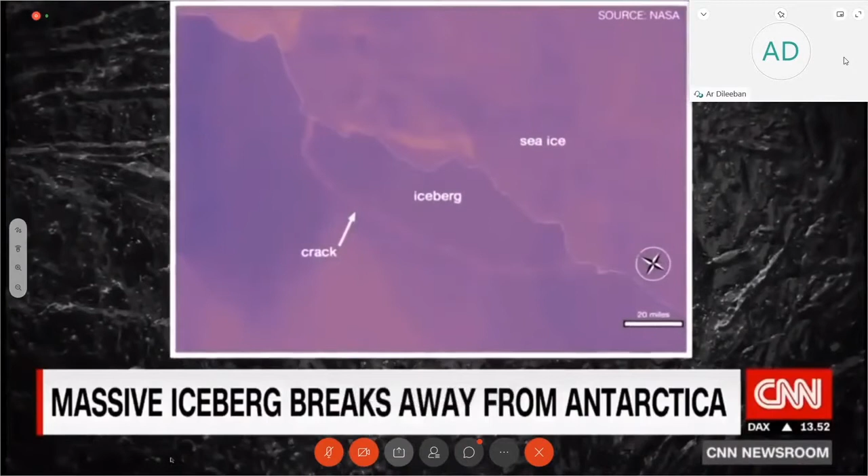More than 120 miles long on the east side of the Antarctic Peninsula, finally breaking off, creating a spectacular iceberg weighing more than 1 trillion metric tons, roughly the size of Delaware. It's one of the largest icebergs in human history. UCLA professor Aradhana Tripathi has spent her career studying Antarctic ice, traveling to the very peninsula where the ice shelf called Larsen C broke off. Professor Tripathi has seen two other big sections of the peninsula break off and dissolve, the first in 1995 and then another in 2002. She watched as this crack grew for years, caught off guard that this break happened so soon.

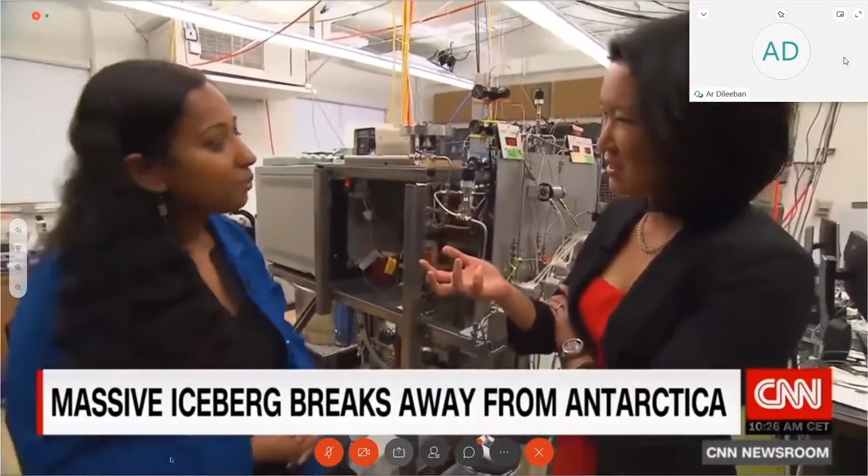What this latest break means is something scientists aren't yet agreed on. Antarctica, the coldest place on Earth, is a continent covered in ice, and icebergs have been breaking away from ice shelves for millions of years. But at the end of the 20th century, the peninsula was one of the fastest warming places on the planet. That warming has slowed or reversed slightly in this century. You learn all of this just from samples of ice, and samples of rock. This geochemist says the overall trends in the Antarctic point to global warming.

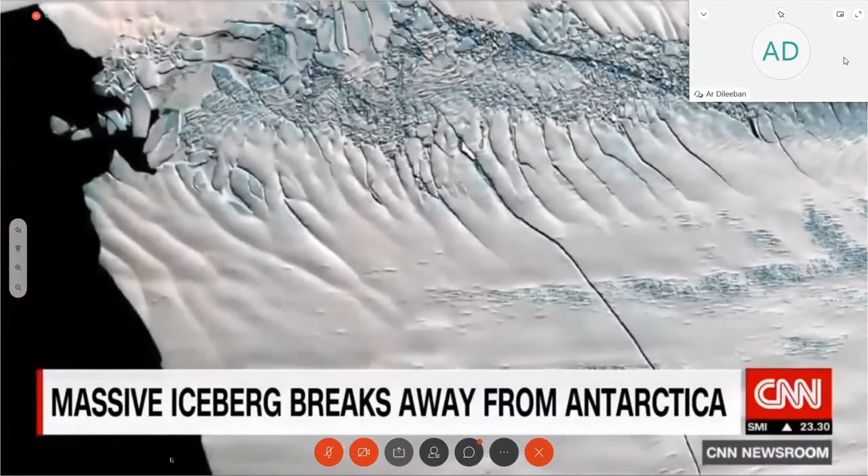The fact that we've had 7 out of the 12 ice shelves on Antarctica collapse in the last few decades, and this one appears to be ready to go with the breaking off of this major iceberg, it's hard to attribute to anything else. For now, scientists will track the new iceberg to see if and when it melts. And maps will have to be redrawn for the ever-changing geography in Antarctica. Kyung Lah, CNN, Los Angeles.

Now I would like you to understand, that means if the building industry takes care, you could have reduced 50% of this development, 40% of the carbon emissions on this earth. And if carbon emissions could have been avoided, it would have been much better, at least 50% better than what we are now. So that is where the World Green Building Council was formed.

And after that, several councils came up under that all over around the world. In 2001, the Indian Green Building Council was formed at Hyderabad. This Indian Green Building Council created a total change, a spectacular change in understanding and creating awareness about the problem of environmental degradation that we are facing.

And they created the first, actually, it was the first building constructed by IGBC in Hyderabad. And this IGBC building was actually constructed on land donated by Godrej.

A small building of 20,000 square feet was constructed. You won't believe that building became the greenest building in the whole world that year. Why? Because IGBC started studying from the Indian context what issues we are facing and how we can make it greener.

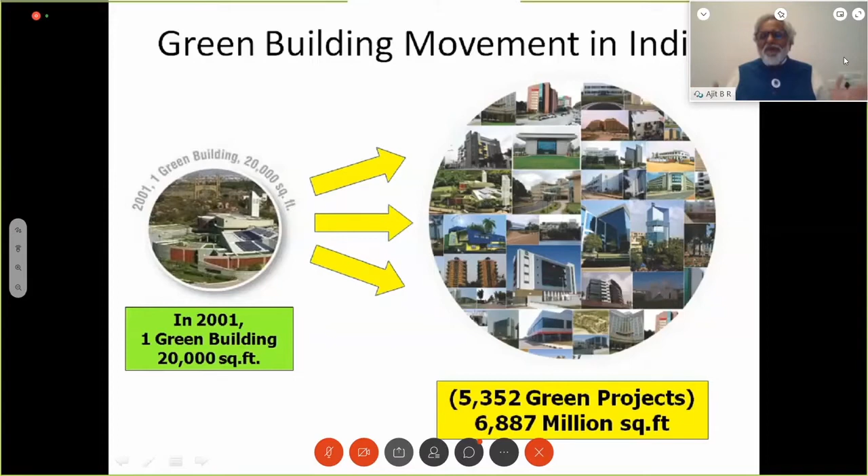The green building is the answer for all this problem today. If entire India constructs only green buildings, 40 to 50% of our carbon footprint can be reduced. So this is something which is probably what we should do.

What is green? It is the pursuit of energy efficiency, the use of recycled and recyclable products. How much can you recycle? There was a time, maybe 30 years back, if somebody wrote 'recycled,' we wouldn't use it - we'd throw it away. But today, recycled products are much more important and valuable, and a lot of organizations, including multinational organizations, ensure they only use recycled products for everything.

If it is a pencil, if it is paper, everything—that is the contribution they bring to society.

What is green? It's the use of renewable energy. You can see windmills, you can see water efficiency, ultimately leading to sustainable development. That is the word to use—sustainable development. What is sustainable development? It means using our resources to meet all our needs without depriving resources for future generations. This is what we should understand most importantly.

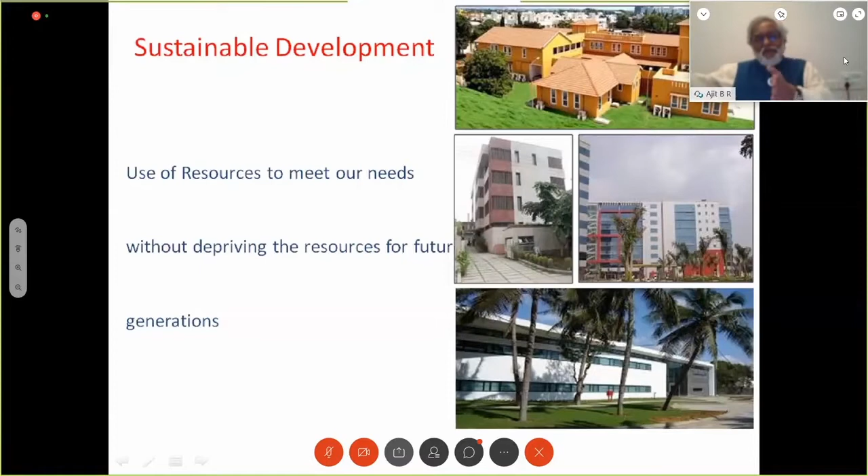We do not own this earth. We are just holding it as trustees for the future. Trustee means the future generation kept it as a trust. It is our responsibility to see that we hand over this earth in a better position than what we got as a trustee.

I just want to compare green building versus conventional building. You can see all the buildings on the right are green buildings. They don't look different—they are externally the same, both look same, and the building uses are also the same. So what is the difference, you ask me?

Green buildings are concerned with natural resources, human comfort, and indoor environment. It's a very important aspect of green building. You may think it's only this, but no—until recently we have been using paints with very high content of VOC, volatile organic compound. Now if you sell paint with VOC, nobody is going to buy it. IGBC brought out this awareness, and now green buildings have become prominent.

Comfort is very important. Are you getting sufficient sunlight? Are you getting unnecessary glare? Are you getting enough cooling even without air conditioning? All these things are very important from the point of view of green buildings.

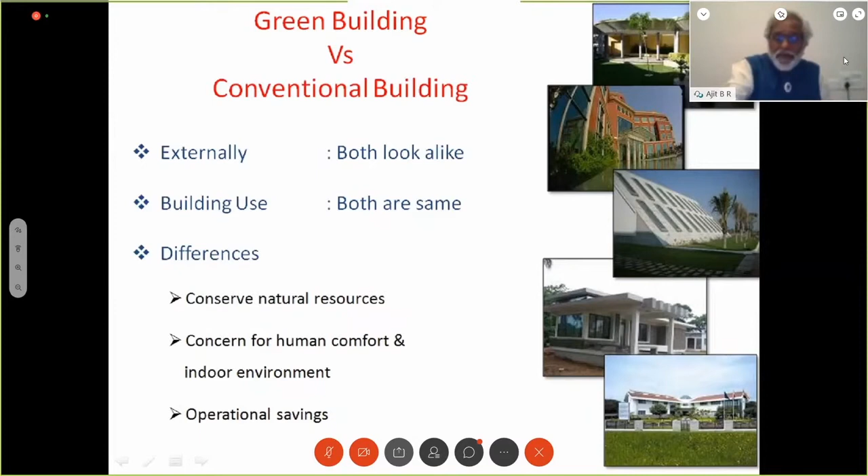What are tangible benefits? There are both tangible and intangible benefits. The tangible ones include reduced operating costs, because all the equipment used consumes less energy. You can optimize the life cycle, improve economic performance, and achieve energy saving.

50% savings has been seen, I think lately it is even more. So a lot of air conditioning companies have come out with fantastic energy-friendly air conditioning systems, because most of the energy used is basically by air conditioning. Water saving is 20 to 30%, and also, in the beginning when we constructed the first green building in India, many products had to be brought from abroad. Today, because of great demand, green products have become very cheap—probably in some ways cheaper than non-green products.

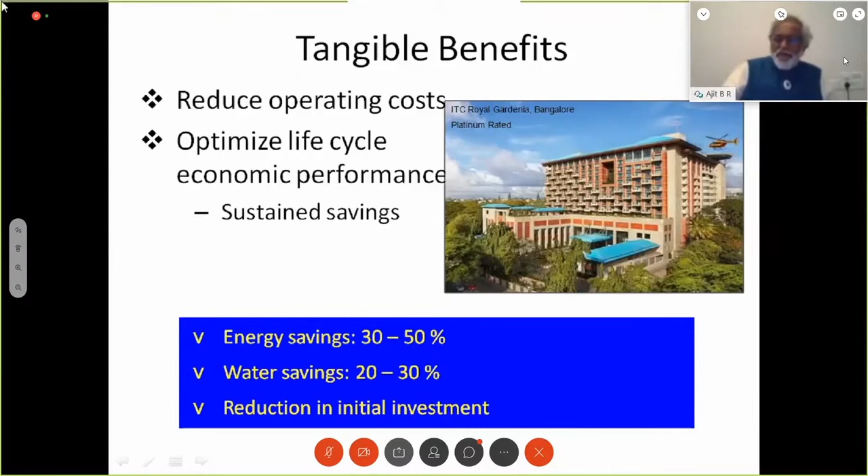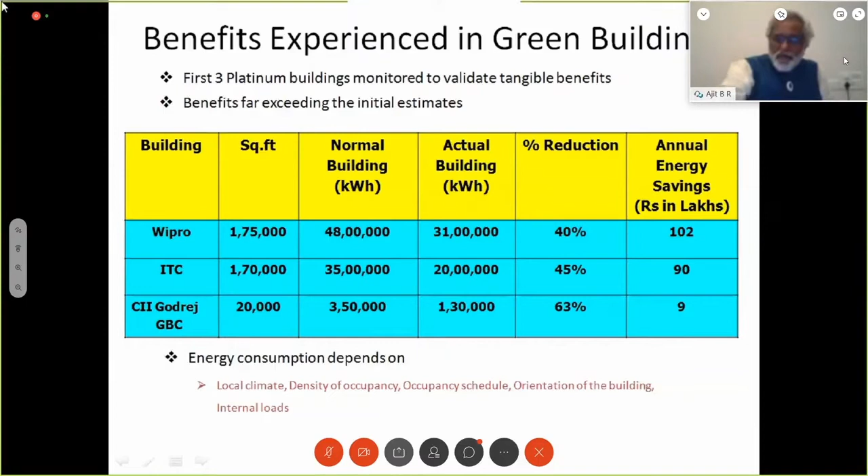So what are the benefits in green building? You will see the benefits in green building. The annual total benefits of certified projects is about 8 million tons, and in each of the green buildings, carbon dioxide reduction and energy saving is 10 million, water saving is 30 million KL, and construction waste diverted from landfills is 3 lakh tons. This is talking about 1 million square feet of building.

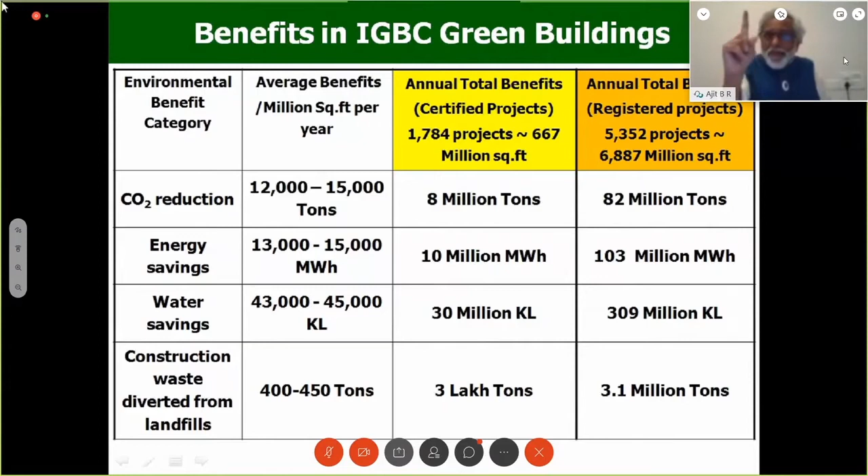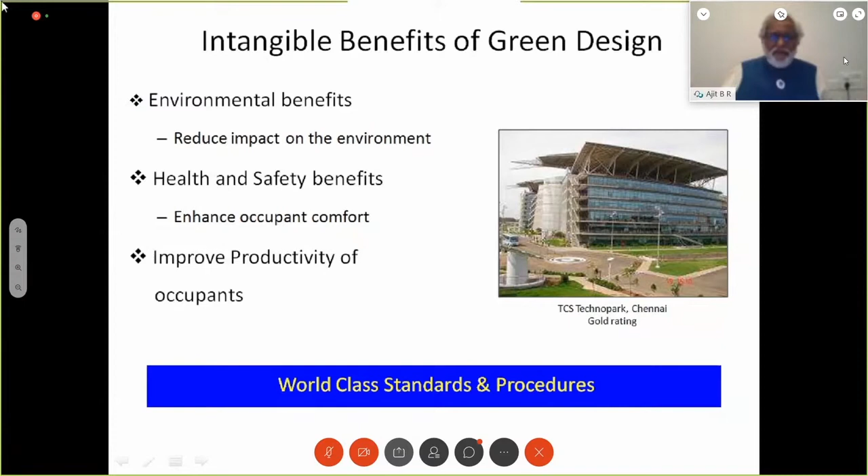Then there are intangible benefits which you cannot directly measure—environmental benefits, reduced impact on the environment, health and safety benefits, and improved productivity. These are all very important things from a green building.

The green building costs more. Earlier when it started, it was about 8 to 12% more. Now, sometimes as an architect, I say even without spending a single extra paisa, only by designing, you need to think differently—think out of the box—and come out with green architecture assets without any outside investment. You can do it with zero investment. If at all you need to invest, it will cost maybe under 2%, but nowadays we have found the entire amount can actually be taken back in 2 to 3 years.

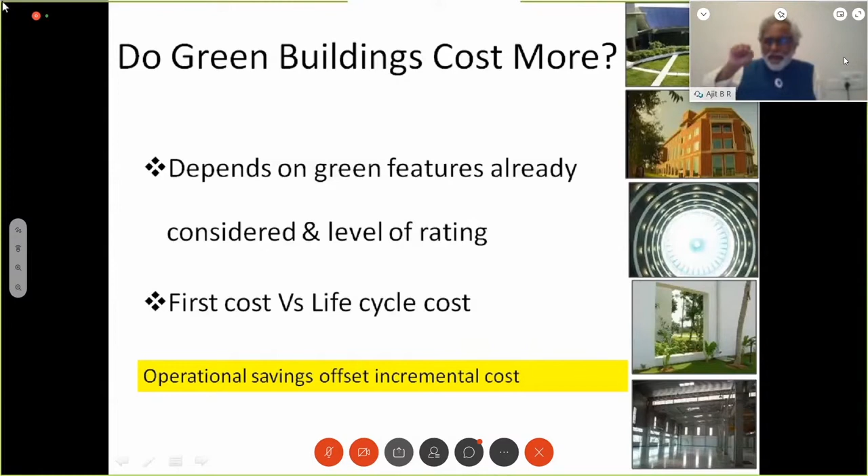What did green buildings do differently?

Some of the items we show in green buildings are waterless urinals, root zone treatment systems, and light pipes that go 20-25 feet behind inside the building. Where you need light, you can bring a light pipe, which brings almost 50-60% of the sunlight into the room. There is also widespread use of flyash blocks, insulated walls, roof glazing, low-emitting interiors, etc.

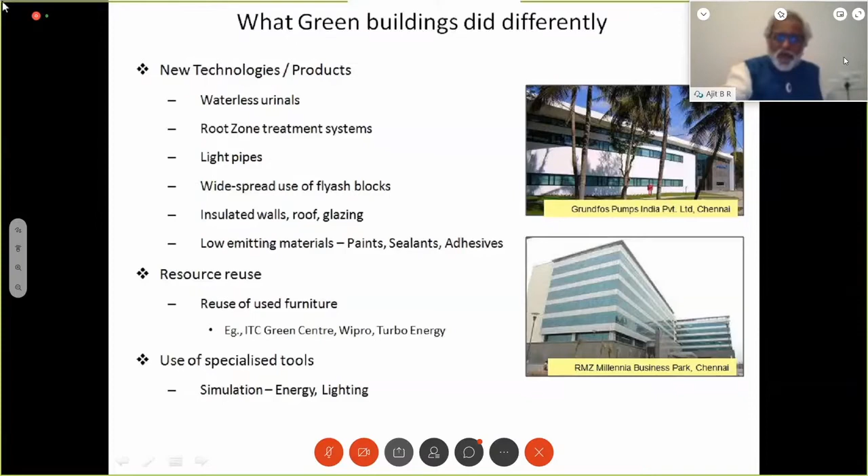Then resource reuse, as I said, we try to reuse many of these materials which are brought in now. There are also innovative emerging green building materials and technologies, and the choice of placing a window - that's what I said earlier. Just by design input itself, you can make it into a green building.

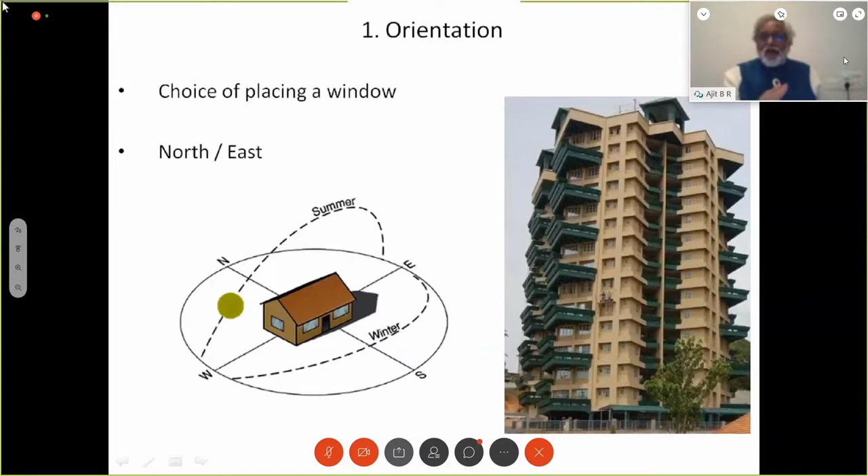What are the design inputs? Most importantly, we are all sitting on the northern side of the hemisphere - it's different in places like Australia, which sits on the southern hemisphere. When you sit on the northern hemisphere, you have to understand that the sun which goes through the equator - our idea is to avoid that, especially in places like Kerala, Tamil Nadu, Maharashtra, which are generally very hot. We need to ensure the building's openings are not towards the south. If you put them towards south, the entire sunlight and accompanying heat will get into the building. So we need something like a north or east direction for the building.

Then shading devices - 80 to 90% of the green building effect can be created by shading. We call it the envelope - it envelopes the building, as architects say. So shading of the buildings is very important.

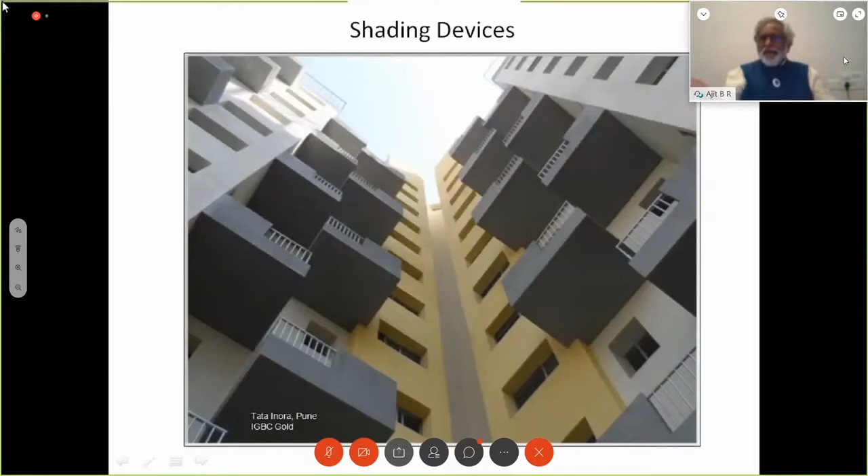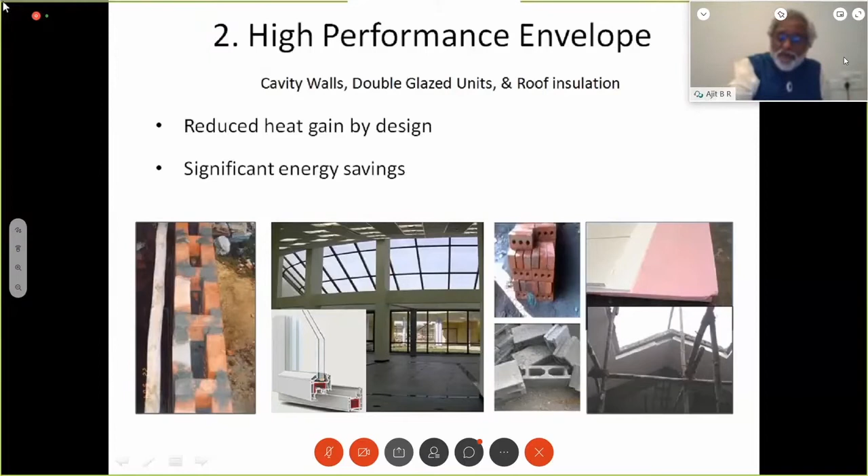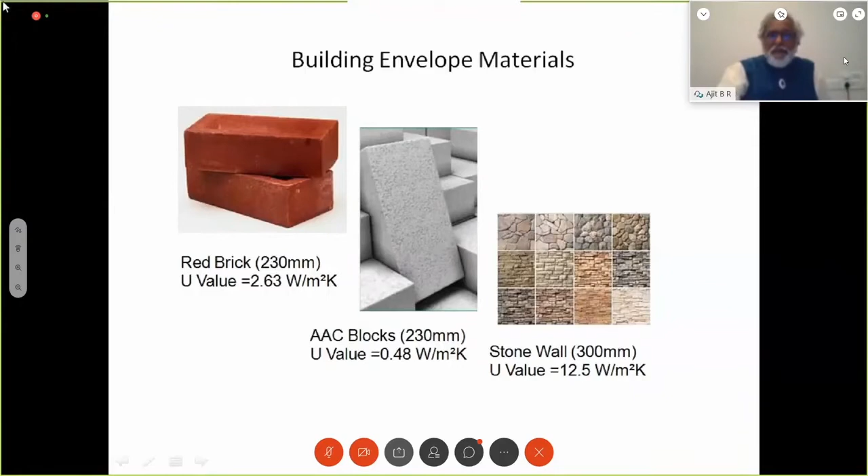Then we have daylighting - I was talking about daylighting, getting maximum light into the building, so we don't have to use artificial light in the daytime at least.

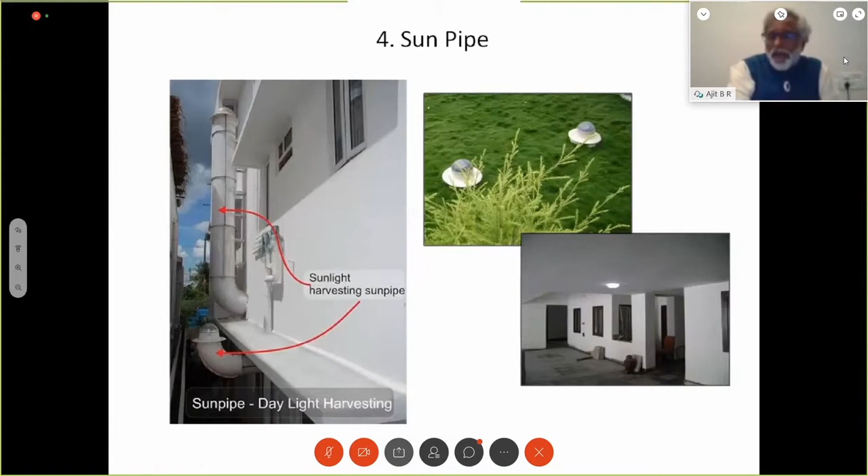Similarly, I was telling you about the sun pipe - the sun pipe is here, you can see it. And this is the light from there, you can capture the sunlight - this is what you see, the sunlight. You might look at it and think it's artificial light, but no, it's sunlight directly coming in.

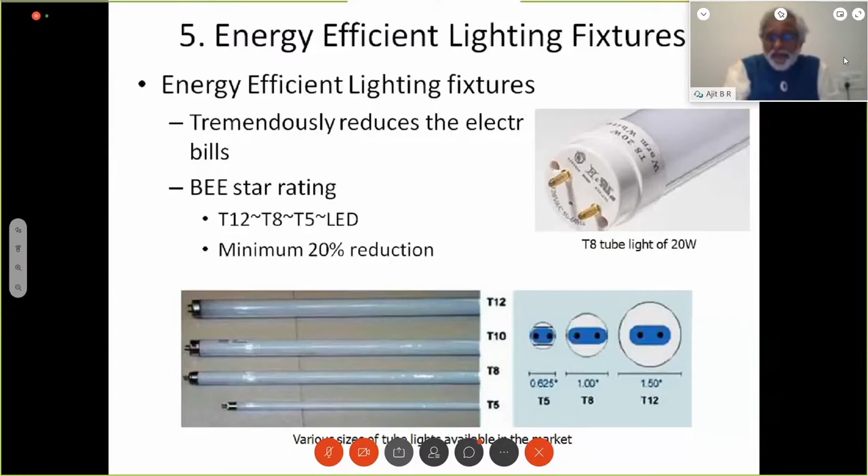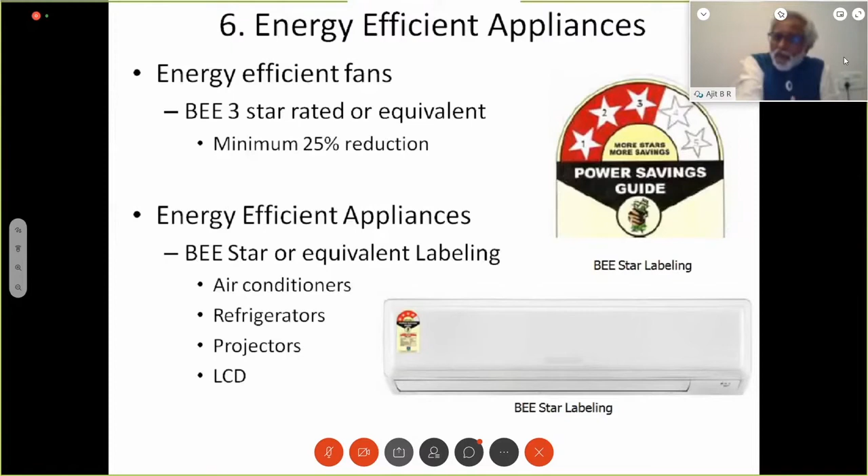Similarly, there are energy efficient lighting fixtures - you see T5 and T8, the lower the number like T5, the more energy efficient. Then there are energy efficient ratings, like the Bureau of Energy Efficiency standard, with star ratings for air conditioners, refrigerators, projectors, LCDs, everything. If it's 3 stars and above, up to 5 stars, you save a lot of energy in your building.

Similarly, there are radiant cooling technologies where you have water pipes going to the slab, so that the heat from the slab does not come below.

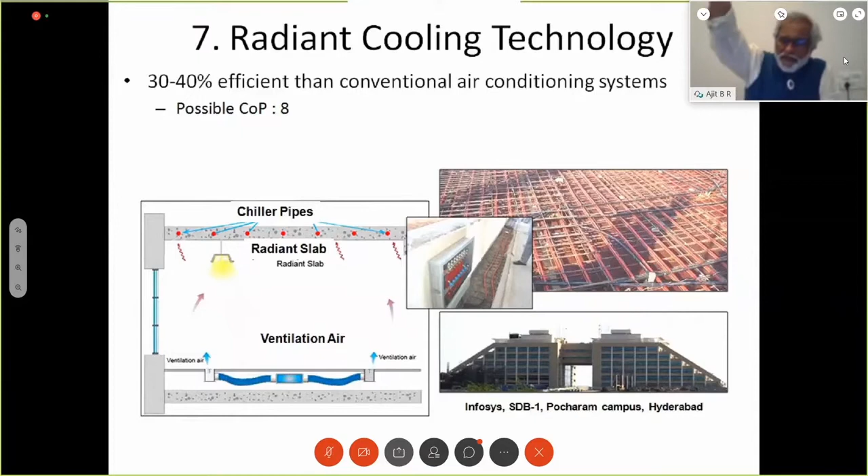Then you have what we call the wind tower advantage - this is a very important thing. In fact, in olden days, all the buildings have wind towers, because the wind tower is quite surprising - when you stand inside, you'll see air flowing, just like standing on a seashore. The only thing is it has to be located where you have maximum air coming in.

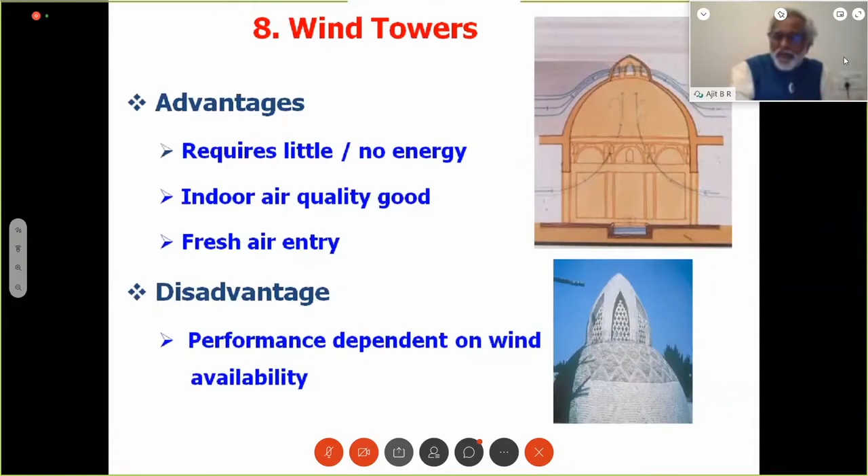Then similarly, renewable energy, as I said, solar panels, wind energy, and a very important thing that has come in lately is what we call building integrated photovoltaic. This means the whole roof, even without putting a separate collector, becomes a photovoltaic system. You can collect energy and give it to the entire building, and even the walls and windows can be used with building integrated photovoltaic.

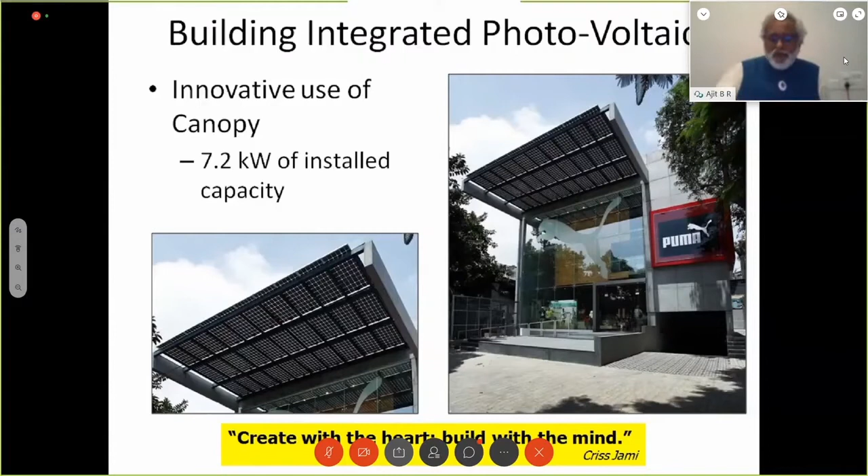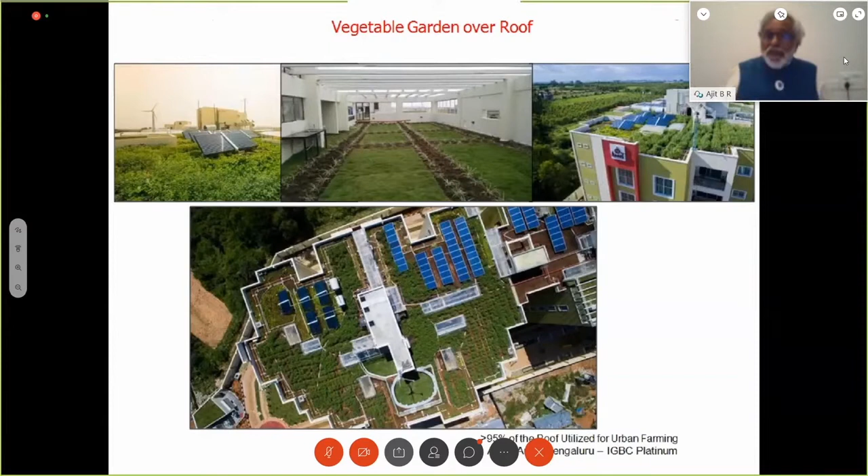It is a fantastic one of the latest innovations we have. Then we have vegetable garden over roof. Why vegetable garden? Not only can you get vegetables for your building or house, but apart from that, it will keep it cool. So that is another thing to do.

Then we have what we call retaining natural vegetation in the building around the area. Then we have what we call the biowall. I'm sure all of us know it, it's quite common now, all over the world. Just 3 years back, this concept was brought into the IGBC. Now it has become very common, and it helps keep the interior of your building cool.

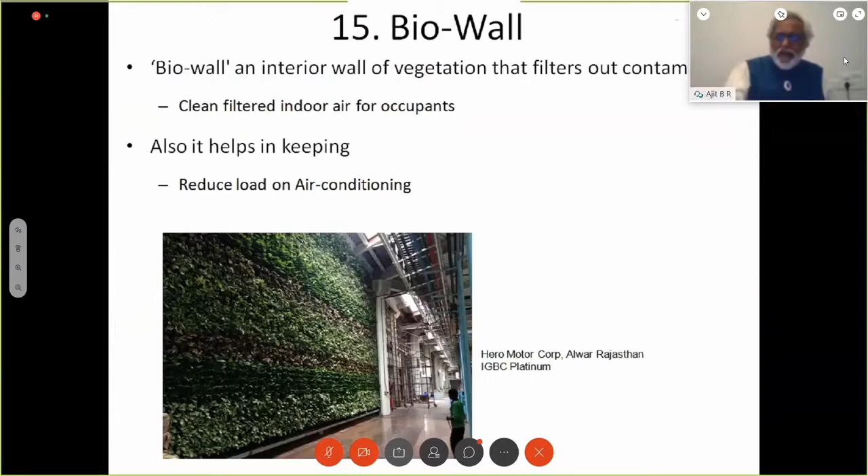And then we have water, I was talking about water first. All you have to do is get what we call aerators, fixed aerators. There are different types of aerators, small and big, for saving water. These aerators will reduce your water consumption much more per minute.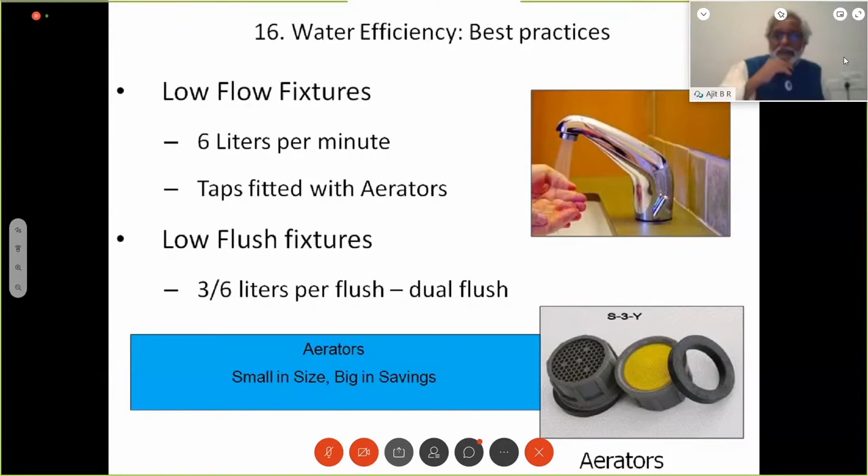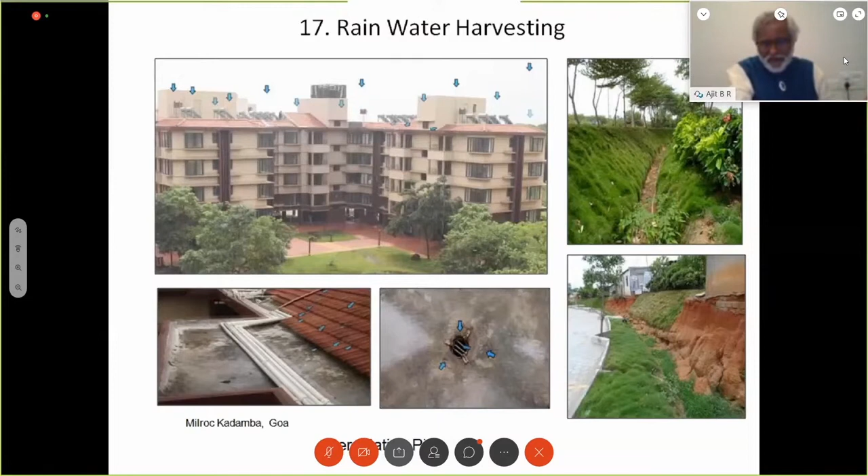Then you have what we call rainwater harvesting, something which the municipalities have already made compulsory. This is where we do not allow rainwater to run away. So that water is saved, it goes down into your land, so that water is always there below. Similarly, we have different types of rainwater harvesting.

Then you have what we call phytoremediation, the root zone method. It's a very fantastic concept. It's not new, it's been there for a few years, where all the dirty wastewater can be let through under this garden. And because of this, unlike many other methods, these plants sort of breathe through the roots.

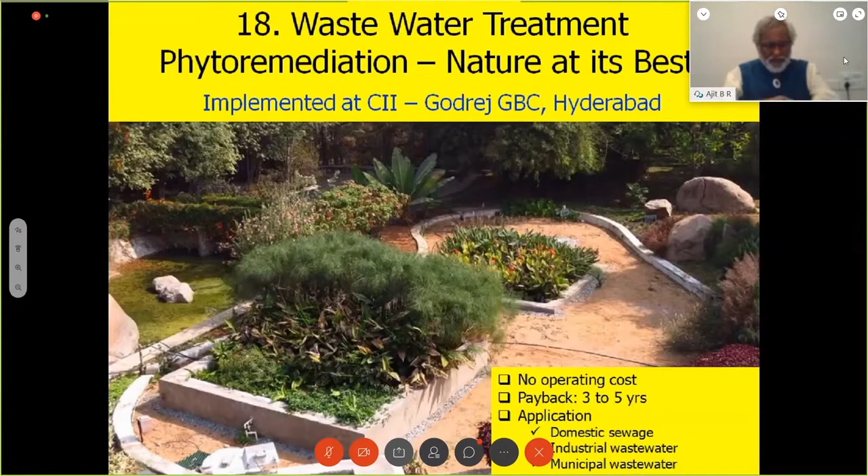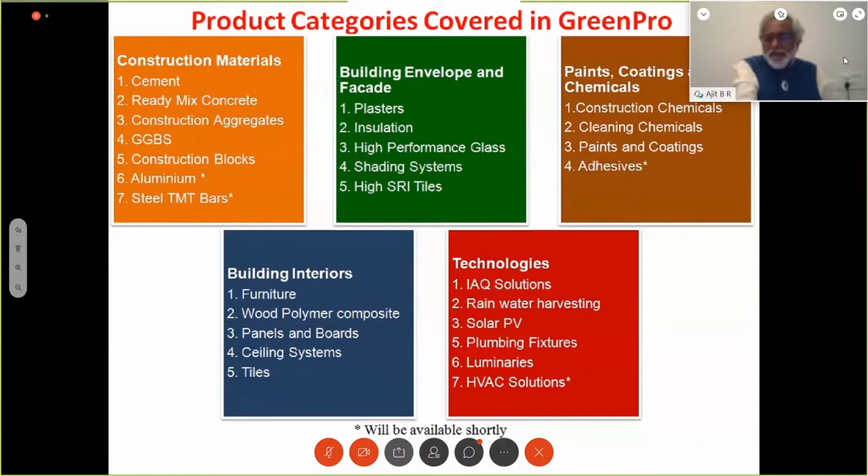There's also now the latest, what we call GreenPro. There are close to 1,000 green products approved by GreenPro. You can see the products, almost 1,000 products are there. So the architect can easily go and ask for a GreenPro certified product, and you can be sure it has got much lesser energy footprint.

And what is a green building? A green building creates a delight when entered, serenity and health when occupied, and regret when departed. It's a basic concept about green building. I would also like to mention some green buildings inaugurated by great people, municipalities, and some other programs.

I would also like to show you 'Let Us Go Green.' Now I would like to show you about green. I think I don't have much time, so I'll rush through.

I was telling you about what is zero energy. Zero energy means nothing other than the entire energy required for the building, the energy for lighting, fans, air conditioning, anything and everything, is produced by the building itself. There are many methods by which this energy can be produced. Now the latest watchword is to build only so much that the building can produce energy by itself. What I'm saying is, if you want to build 10,000 square feet, you must ensure that there are enough solar panels, enough windmills if possible, possibly off-site. That is, you can have an agreement with somewhere else outside, maybe 300 kilometers away, for providing energy, like where the windmills are. So the building you build should be 100% self-sufficient in energy.

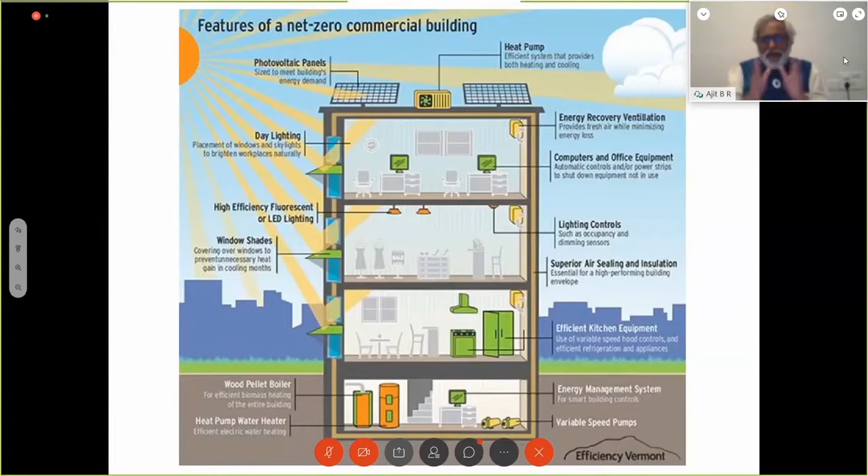Now you can see here the points you can do: roof insulation, wall insulation, automation system, bioclimatic architecture, photovoltaic systems on the top, heat pumps, double glazing windows, all LED lighting. All this adds up to take you to full energy efficiency.

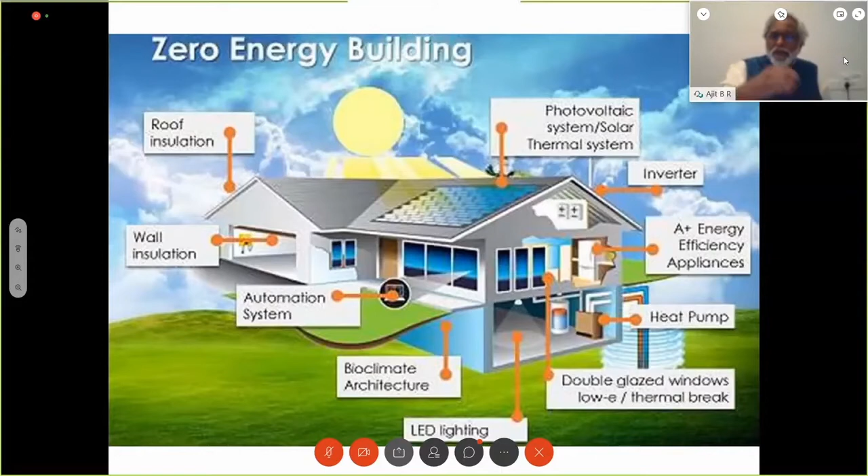Not that. Not just the one before that.

What is a zero-energy building? Most buildings today use a lot of energy to keep the lights on, cool the air, heat water, and power personal devices. Even installing solar systems will not significantly counter the heavy energy load. There are, however, some buildings that strike a balance or even tip the scales the other way. These are called zero-energy buildings.

They manage this feat by being extremely energy efficient, saving 50 to 70% more energy than typical buildings. In these ultra-high performance buildings, the amount of energy used can be completely offset by renewable energy produced on or around the building. When conditions are not suitable for energy generation, the building will draw energy from the electrical grid to meet its needs. When conditions improve, the on-site renewable energy systems will cover the building's energy needs and send excess energy back into the grid to make up the balance.

Over the course of a year, the building gives back as much energy as it takes. When zero energy concepts are applied to groups of buildings, the benefits are shared and multiplied within that zero energy community. These buildings are also more comfortable, more reliable, affordable to build and operate, and better for the environment.

I think I would not like to take up some sections of another project of ours that I don't want to cover. Can you play the last video? I'll show you a video wherein we have done so many applications to make it into almost a zero energy building. It was in a very distant site. Please go ahead.